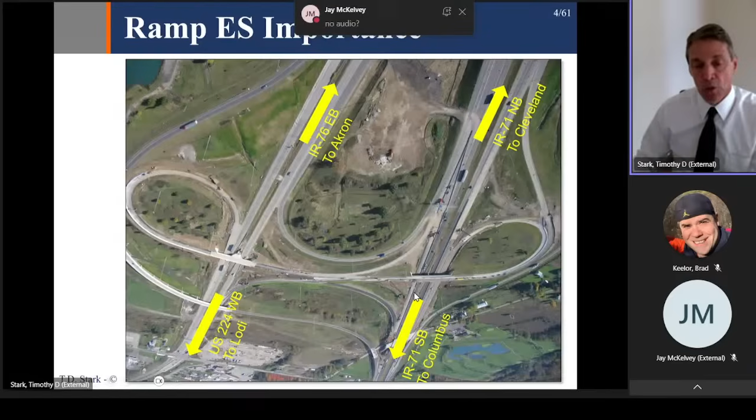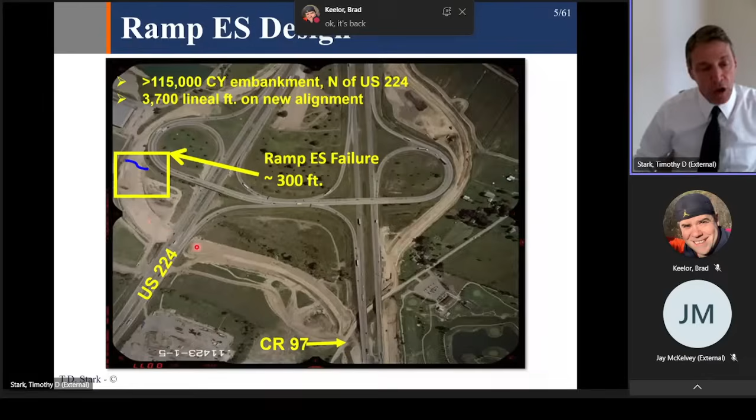We're going to focus over here on this ES ramp. There's about a 115,000 cubic yard embankment. It's about 3,700 feet long. And right in this area where the little blue line is, a creek went through here. You'll see a culvert in just a minute that was placed temporarily through the embankment during construction. Then, on this embankment, there was going to be a bridge across to the other embankment, which is an on-ramp to the interstate heading south.

Prefabricated vertical drains were used to accelerate the consolidation of the soft clays under the embankment. That was known up front. They were weak, soft clays. The drain spacing is 6 foot center to center. The drains are about 4 inches wide, 6 millimeters thick, and they were driven either 35 to 60 feet deep.

A sand blanket, as you can see right here in the lower photograph, was installed on top of the ground surface to facilitate drainage of the consolidation water coming out of the foundation. A T-shaped mandrel and anchor plates were used to drive the PVDs, and that's important because the horizontal hydraulic conductivity, or coefficient of consolidation, is going to be important in just a minute.

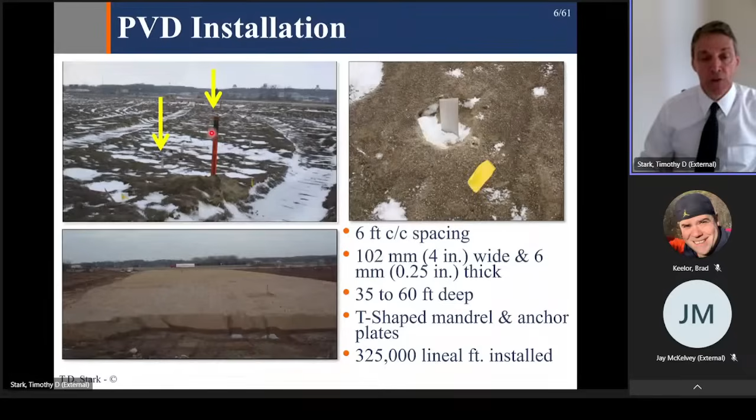325,000 lineal feet of PVD was installed. Some instrumentation was also installed. Here's a settlement plate to monitor settlement of the embankment, as well as some piezometers.

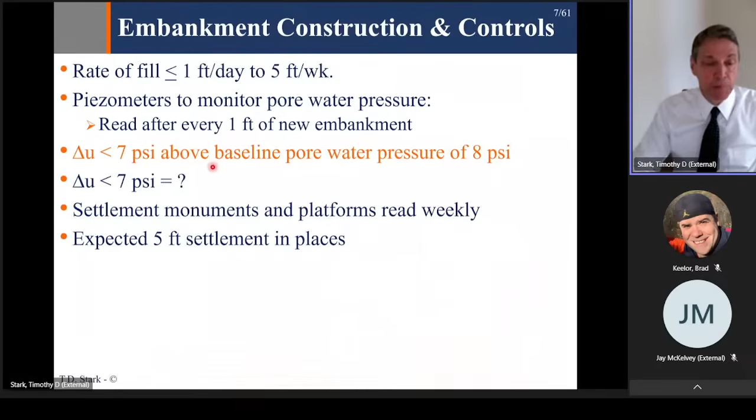The embankment construction was going to be controlled, and the rate of filling could not exceed 1 foot per day or 5 feet per week because of the soft clay and allowing consolidation. Piezometers were installed to monitor the pore water pressure, and if the change in pore water pressure exceeded 7 psi, above the baseline pore water pressure of 8 psi, so a total of 15 psi, the filling would stop. So the rate was controlled as well as the pore water pressure generation. Settlement monuments were read weekly, with 5 feet of settlement expected in some places.

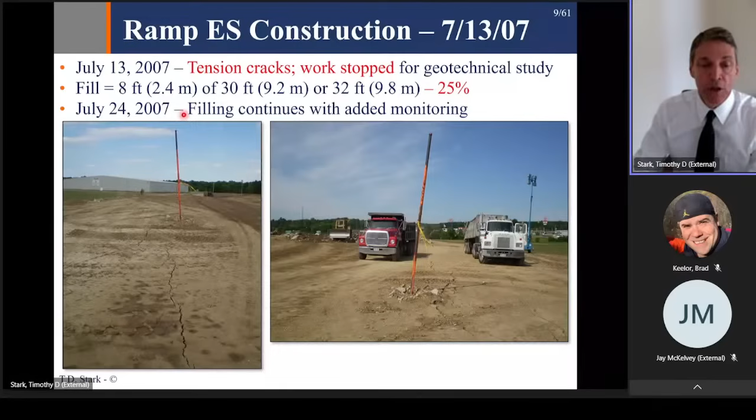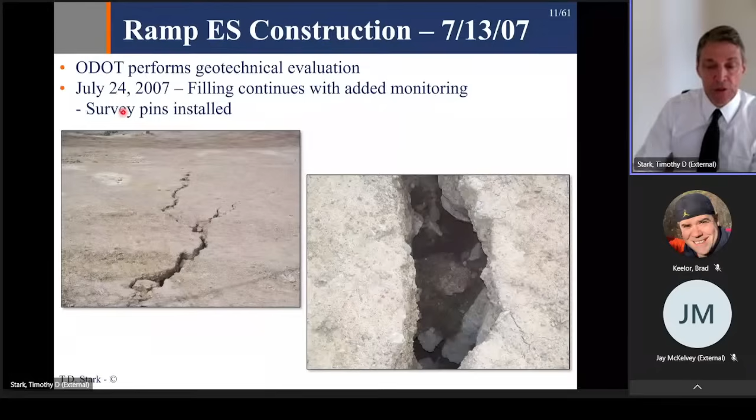Here's the tension cracks, just to give you an idea what they look like. Here's some going across the top of the embankment there. On July 24th, about 11 days later, filling continues with added monitoring. So some survey points and so on to more carefully monitor the embankment. Here's some more tension cracks that developed on July 13th. Okay, so ODOT performs the geotechnical evaluation and lets the filling continue about 11 days later with some survey pins, etc., installed. That goes until July 30th.

More tension cracks develop after the fill reaches now 13 feet. So it's not even half the height of the embankment. August 1st, about 1 month after start, the change in pore water pressure is greater than 7 psi, so work is stopped. Survey pins show uplift and toe rotation outside of the embankment area, basically off the property. And I'll show you a photograph of that in just a minute.

August 2nd, cracking from station 202 to 207, about 500 feet long, develops. August 6th, a 1.5 foot high scarp at the ramp center line develops, and it displaces a chain link fence that separates the right of way from a private property. And I'll show you a photograph of that. And that confirms the survey pin showing uplift and toe rotation.

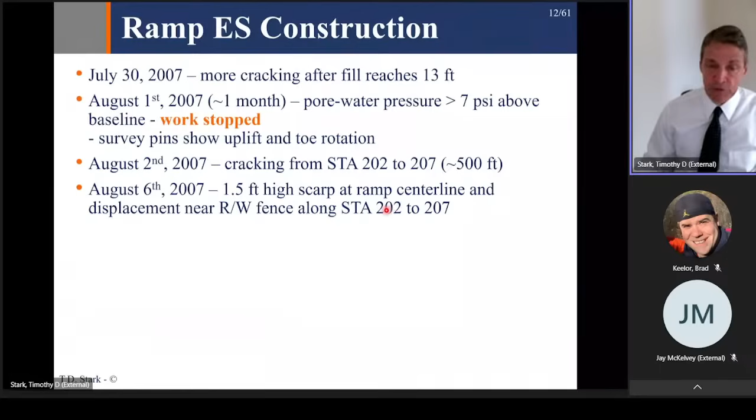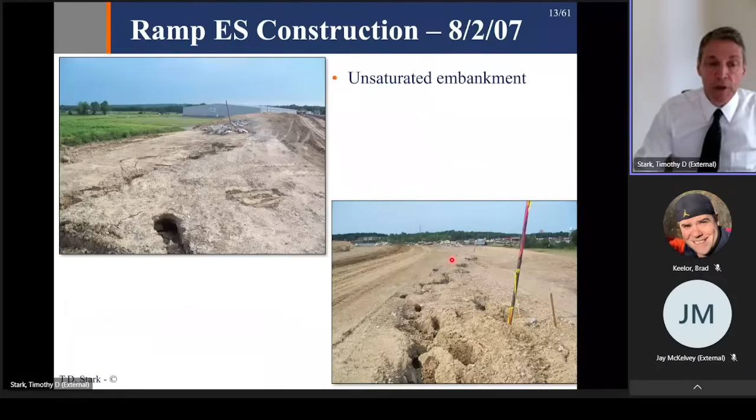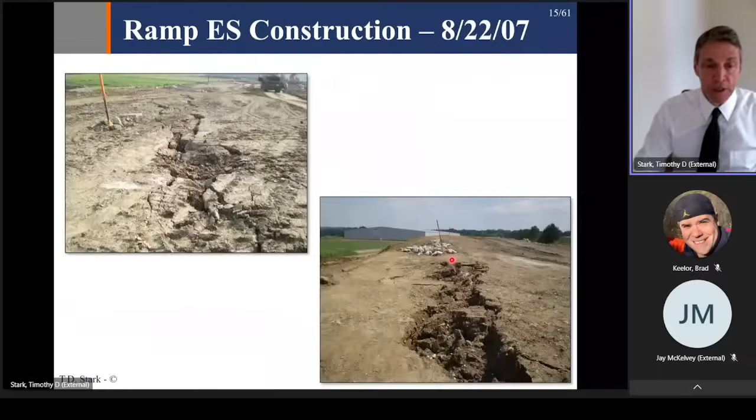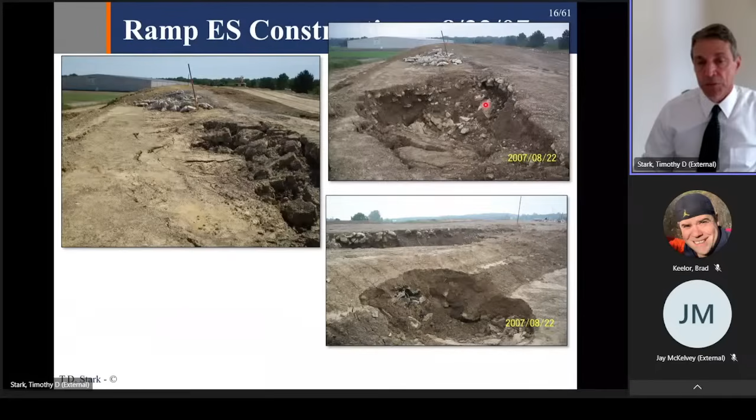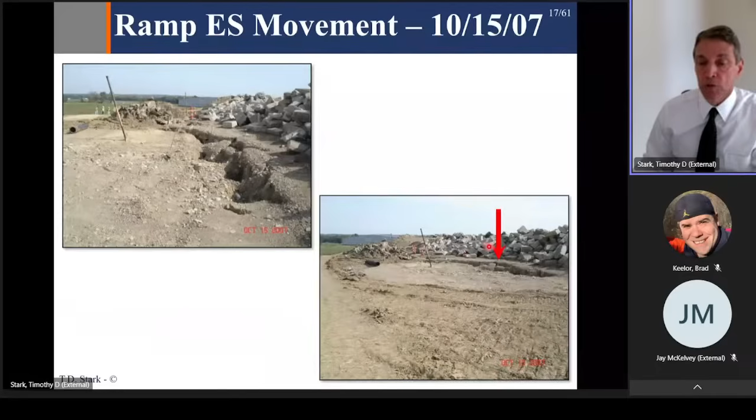October 15th, there's the scarp. There is some concrete rubble fill behind it, which was kind of interesting. The scarp formed in front of the concrete rubble, but that was allowed. The contract allowed for 10% of the fill to be concrete rubble, so that's why it's there.

And now here's the chain link fence that I mentioned earlier in the private property on the left. This fence used to be a straight line right across there, and here's a close-up of it. So the toe rotated up and rotated out, pushing the fence onto the other property.

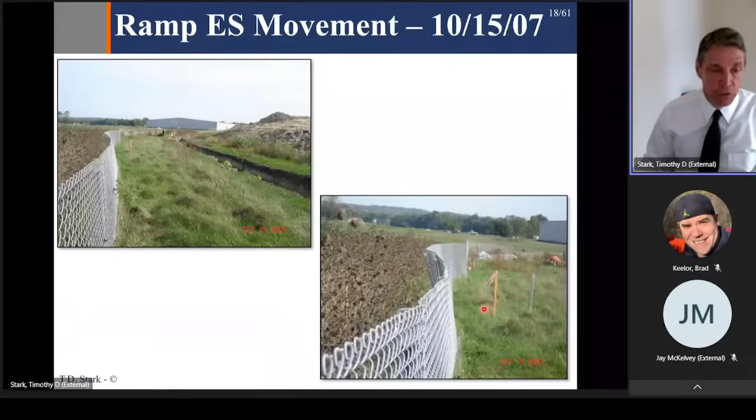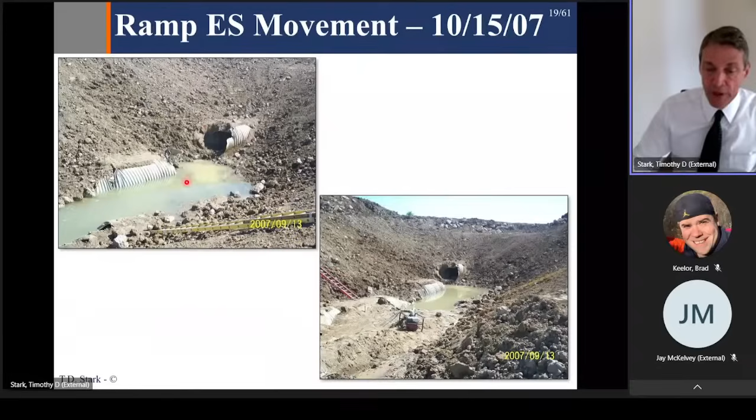I mentioned a culvert installed for the creek. There it is. It was a temporary culvert, and so after the movement of the fence and the stoppage of work, the embankment was excavated to figure out what was happening. And that's a picture of the culvert after it was exposed. You can see it was basically sheared, indicating movement in the foundation, sort of shearing off the culvert and moving it towards the chain link fence.

Okay, so everybody, that's the good news. Bad news is the remediation. A number of techniques were proposed to remediate this embankment area. And what was driving the remediation is a potential contract delay of about $250,000 per month.

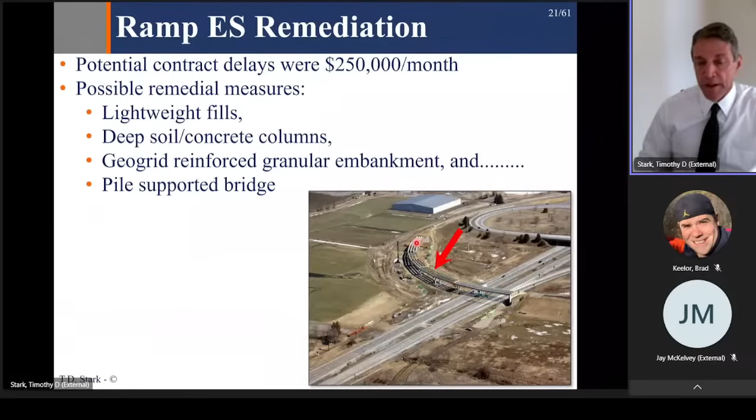Some of the possible remedial measures included lightweight fill, deep soil/concrete columns, geogrid reinforced granular embankment, and other geotechnical type remedial measures. However, and this is the bad news, it was decided to replace the embankment with a pile supported bridge. And that's what you see in the photograph. There's the bridge. So all that embankment material was removed and piles were driven for each of the bridge bents right here. And that off ramp, even today, is a bridge.

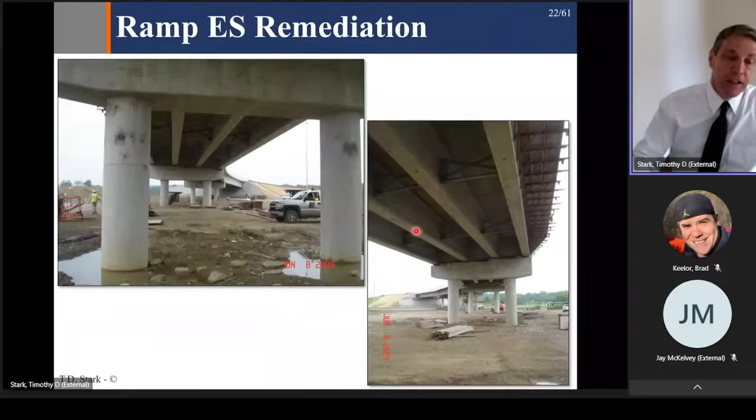And there it is, an aerial photograph. There's the bridge ramp to I-71 heading south. So that's unfortunate that it turned out to be a structural remedial measure instead of a geotechnical remedial measure. But the delay costs built into the contract and some uncertainties about the geotechnical conditions and the performance of the geotechnical remedial measure led to a bridge. So that's really the bad news of the case, that we couldn't keep it as a geotechnical remedial measure.

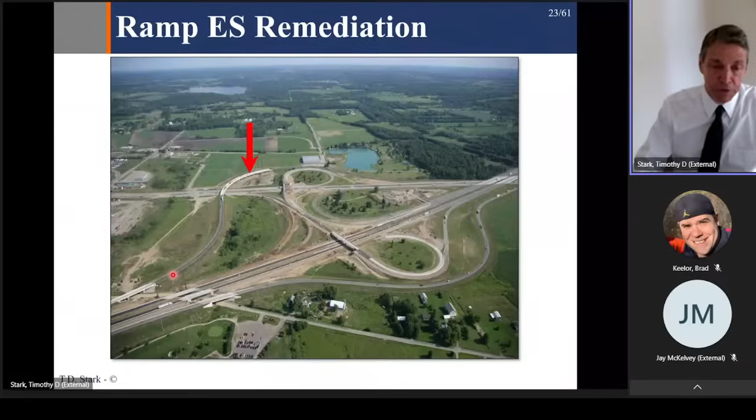Okay, so let me focus on the three causes of the failure. First, stratigraphy, the horizontal coefficient of consolidation, and finally, the embankment strength. These three factors, I think, really contributed to the failure occurring. Okay, so let's talk about subsurface conditions first.

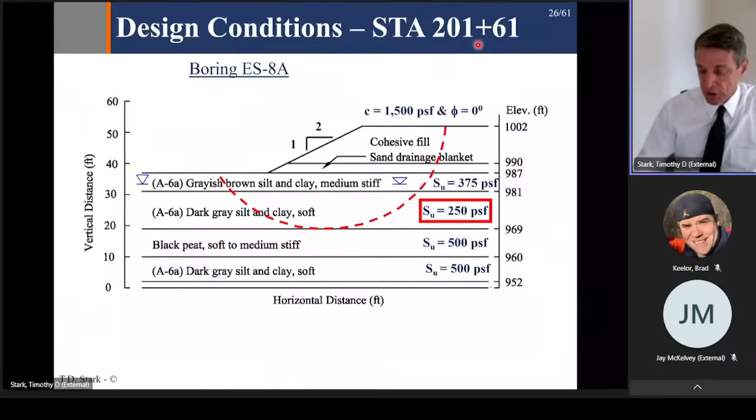So this is the design cross-section, boring 8A, which is in the slide area or the failure area, but there's another boring that is also in the slide area. This one's at station 201+61. The next boring is 8C, as in Charlie, at station 203+58. Notice now that the soft clay layer is deeper. There's 250, 250, just as you saw in the prior cross-section.

But now at a deeper depth, there's an even weaker clay layer, and that's about 10 feet thick from 954 to 964. And a slope inclinometer was installed. That's what this purple square is right here. And that was projected to this station 203+58. And it puts the failure surface in this weaker clay at a deeper depth.

And this corresponds to the old stream area. So there's a thicker weak layer here. It goes from 974 to 954, about 20 feet thick, and the bottom of it is even weaker than 250 pounds per square foot undrained shear strength. So the lesson on this first takeaway, or the first cause, is you must find the critical cross section. Plot up the borings, find the thickest and weakest clay layer, and that's where the design should focus.

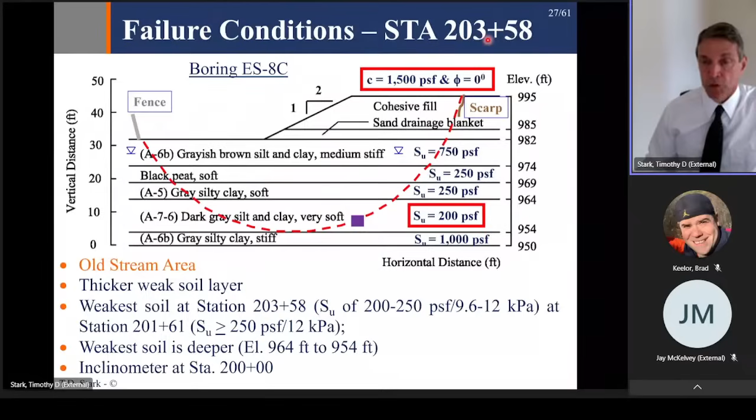And this cross section is in pretty good agreement with the fence being pushed out on the left up here and the scarp developing here in the cohesive fill. The inclinometer was at station 200+00, so it's projected about 350 feet.

Okay, that brings me to cause number 2, the horizontal coefficient of consolidation. That is important because, remember, the prefabricated vertical drains were installed, so we're interested in the horizontal coefficient of consolidation, not the vertical coefficient of consolidation. Okay, because drainage is going to occur radially or horizontally, not vertically.

Okay, so the idea of the PVDs was to speed up the consolidation of the soft clays. And so here are the design values of the undrained shear strength in the foundation, as I showed in the last cross section at 203+58: 250, 250, and the weakest layer being an undrained strength of 200.

So at the end of construction, there would be no consolidation: 750, 250, 200. But the design at the end of primary consolidation at 15 feet of fill assumed that there would be 824, 732, and 477 undrained shear strength in those 3 weak layers, because the prefabricated vertical drains would accelerate the consolidation and allow end of primary consolidation to occur when the embankment reached 15 feet. That would yield an undrained factor of safety of 1.8, which would indicate stability.

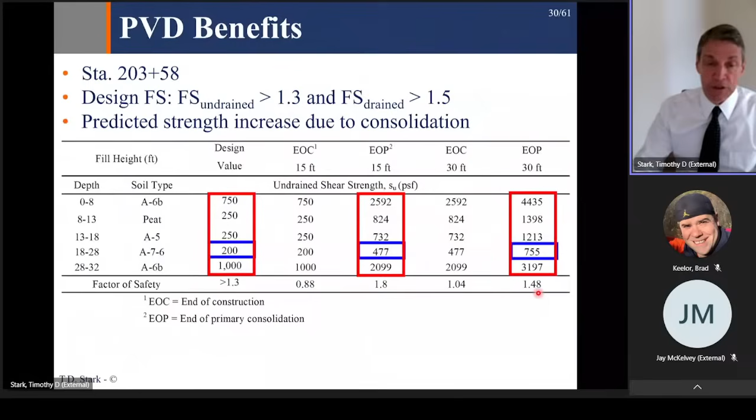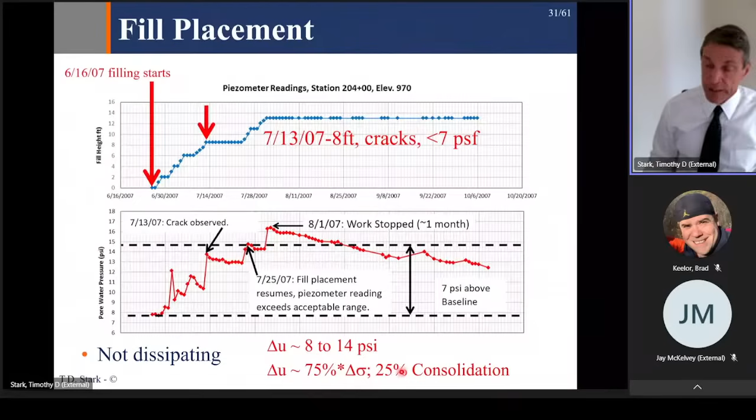But at the end of primary consolidation at 30 feet, now the undrained shear strengths would be 1398, 1213, and 755, which would yield a factor of safety of almost 1.5. And that would indicate the embankment would be stable at 30 feet. Again, it starts cracking at 8 feet. Okay, so here's the fill placement diagram that I showed you earlier. And again, a quick calculation on the increase in pore water pressure compared to the increase in fill height, or delta sigma, would give you an indication that it was really only a 25% consolidation, not 100% or end of primary. So why did that consolidation not occur?

And for all the design engineers out there, my hat's off to you. It's far easier to look at a case after the fact when you know the answer. The hard part is to look at the soft clay up front and get it right. So my hat's off to all the design engineers that are listening. You really have the hard job. My job is kind of the easy job because I know the answer. I know when the factor of safety reached 1. And so it's a much easier analysis. So with that in mind, that's the first bullet, easier than design.

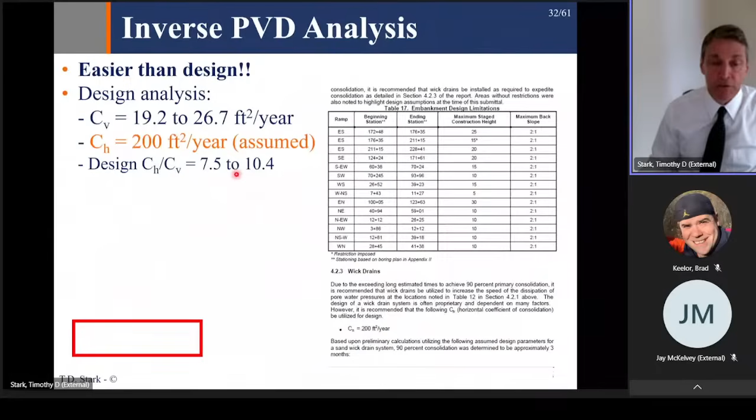The design analysis had a C sub V of about 19 to 26 or 27 feet squared per year. However, the design assumed a horizontal coefficient of consolidation of about 200 feet squared per year. And you can see that here on the right from the geotech report. It comes down and says for the design of the wick drain system, it is recommended that C sub H be utilized for design of 200 feet squared per year. Well, that would yield a design ratio of C sub H to C sub V of about 7.5 to 10.4. And so one of the takeaways here will be, what is a reasonable C sub H over C sub V to use for design?

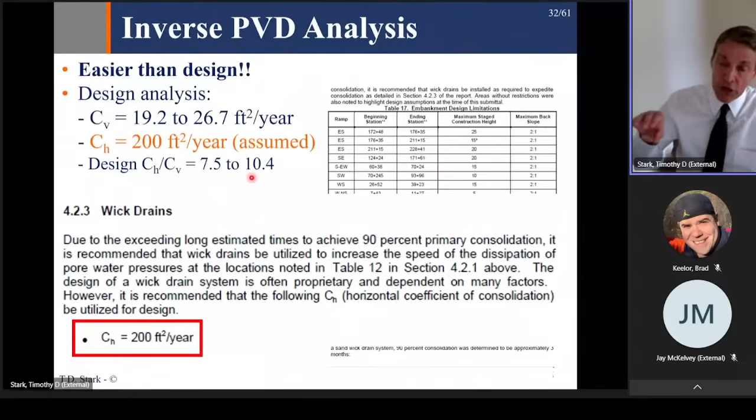And there's a blow up of the recommendation of C sub H being 200 feet squared per year. You'll see on a slide in just a minute, this ratio of 7.5 to 10 is too high. And so the design inherently assumed there would be more radial or horizontal drainage and thus consolidation than actually occurred. So that brings me to the Asaoka method. And this is really a great method for using field settlement data to estimate the mobilized or field C sub H data when prefabricated vertical drains are installed.

So this is a paper by Asaoka in 1978, and you plot the settlement data on a graph of settlement at one time versus settlement at another time. And so that's what you're looking at here. And you draw a line through that. And here's the end of primary right here. And so you can use this plot, and there's some equations. I didn't include all the equations, but they're all built into Asaoka's paper. They're also in my technical paper. And that yields a mobilized C sub H of about 68 to 91 feet squared per year.

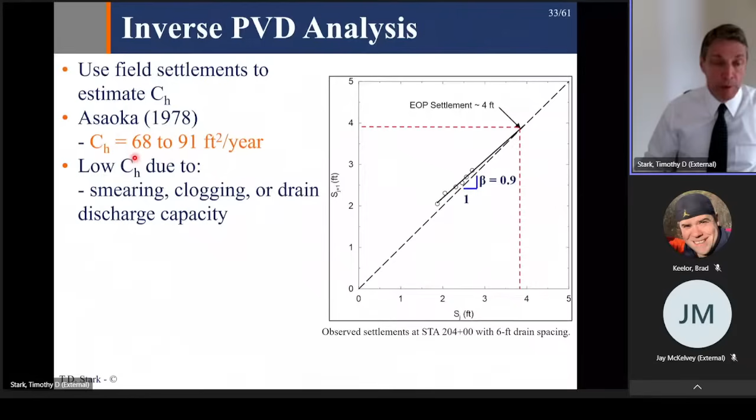So if you are remembering, the design is 200. So this is about a quarter to about half of the design C sub H. And that's really why the foundation clays were not consolidating as fast as it was assumed in the design. The low horizontal coefficient of consolidation could be due to smearing, clogging, or a lack of drain capacity to dissipate the consolidation water to the sand blanket at the top or permeable layer below. So either way, the C sub H ends up to be about a quarter to a half of the design value.

And here's the design analysis. So the C sub H is 7.5 to about 10, the ratio. So a typical design ratio is only about 1.5 to 4. So if you don't have the value of C sub H, use your vertical coefficient of consolidation and multiply it by 1.5 to 4. Maybe a good number might be 2.

And if you would do that, 2 times 68 would only be like 136, not 200. And so using the Asaoka value of C sub H, you calculate a ratio of 2.6 to 3.6. Okay, that ratio is nicely within the typical ratio of 1.5 to 4. And this is the main reason why the foundation clays did not consolidate as fast as was assumed.

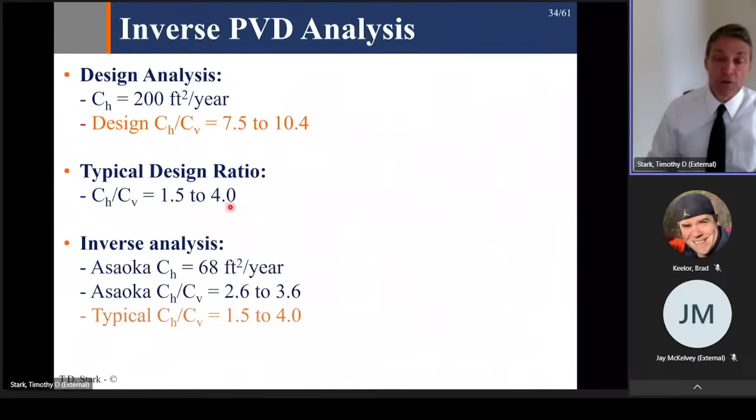Okay, so takeaway lesson number 2. Use a ratio of C sub H to C sub V of 1.5 to 4. The first takeaway is find the critical cross section, find the weakest soil stratigraphy, and use that for design. Okay, so the Asaoka method, verify design assumptions and C sub H, and this follows the observational method with Professor Peck. Design for the most probable conditions, understand problems for most unfavorable conditions, such as the C sub H being a quarter to a half of the design.

Select quantities to be measured and calculated during construction. And so this case would be settlements of the embankment, and then your calculation of C sub H using the Asaoka method. And once you've calculated C sub H using the Asaoka method, you could see that it was not consolidating as fast, so you could change the fill rate procedure such that you did not have the failure. Select design modifications if deviation, start construction and measurements, and adjust filling rate to maintain stability. This turned out to be a pretty expensive repair with the bridge replacing the embankment, and so having this in place could have saved a substantial amount of money.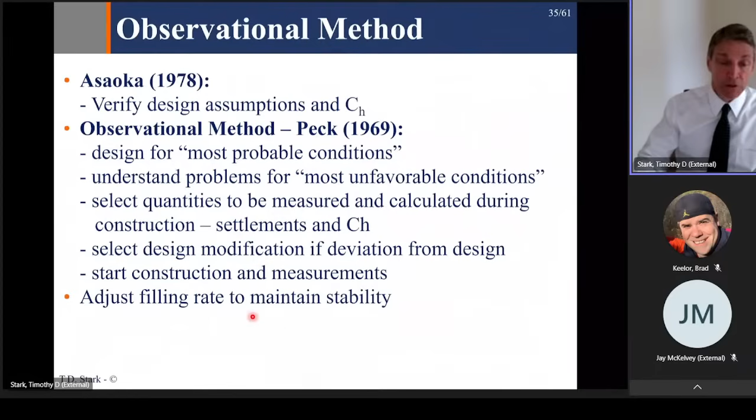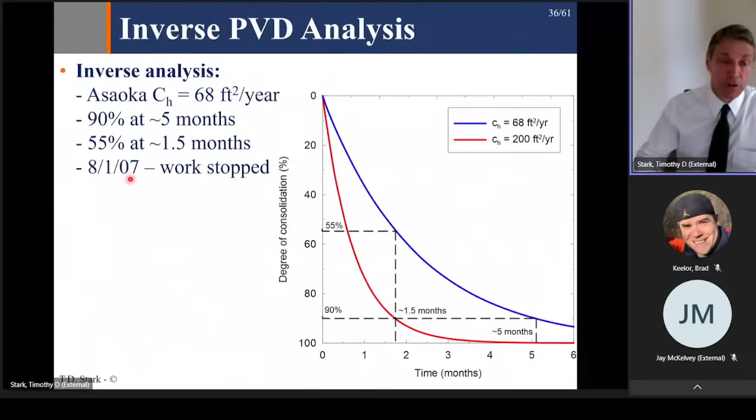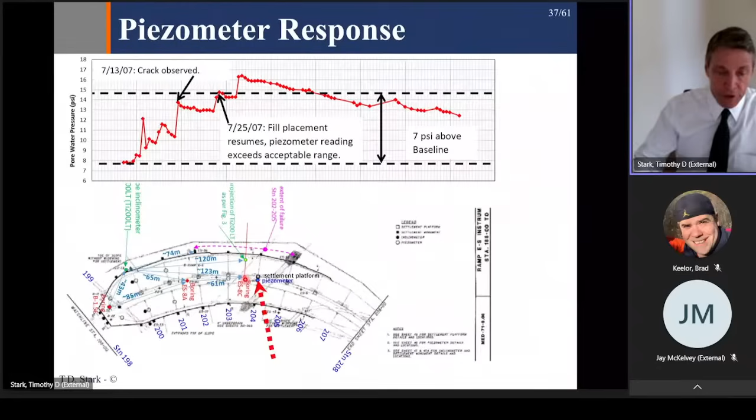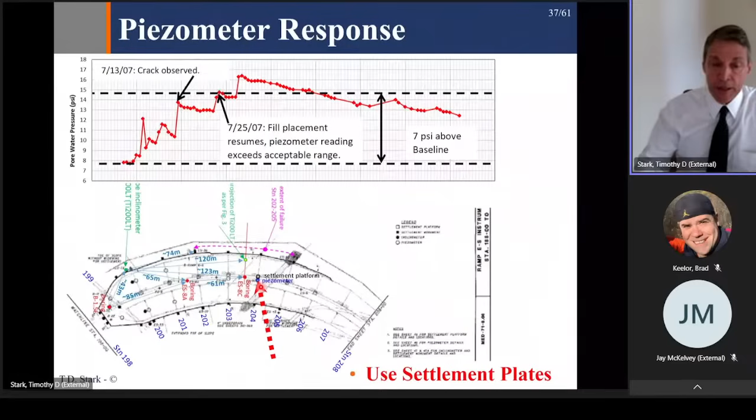And here's the piezometer response. As I mentioned before, the piezometers. This is the critical cross-section right here, boring 8C. The design cross-section, this is the boring 8A I mentioned earlier, is over here on to the left, and the failure developing right here around boring 8C. Okay, and there's the piezometer right there, right close to boring 8C, and that's what gave the piezometric response I showed earlier and above. Use settlement plates, and that's really important because that allows you to use the Asaoka method to estimate your mobilized C sub H. Okay, that brings me to the third cause, embankment strength.

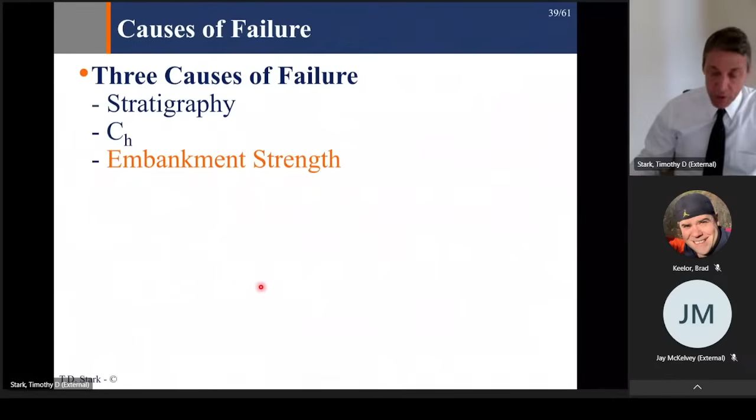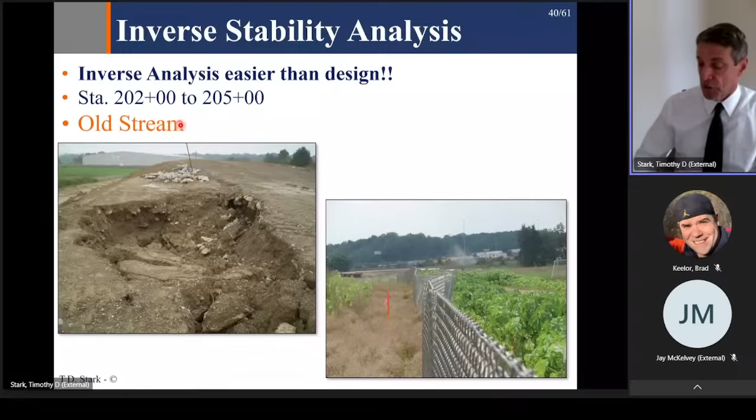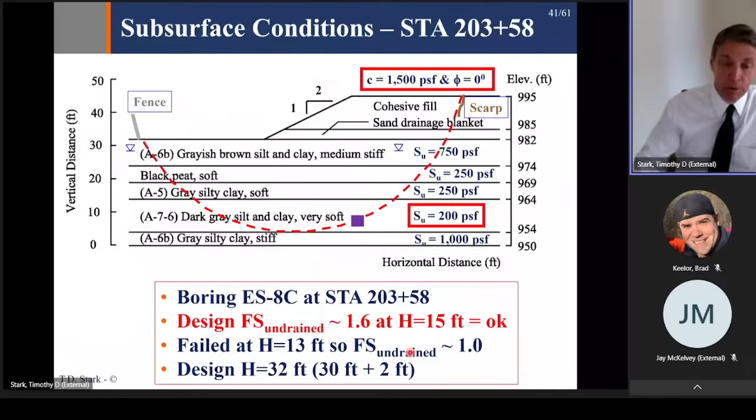So the design undrained factor of safety was 1.6 at a height of 15 feet. And that's why it was assumed to be okay for design. But the embankments failed at only 13 feet. So again, we know the answer is 1.0 at 13 feet. And that's well less than the 32 feet that was the focus. But you can quickly do a bearing capacity analysis before you do your slope stability analysis, and you could see that this was going to be a problem if the consolidation did not occur. So that's what's next. Here is the undrained bearing capacity analysis.

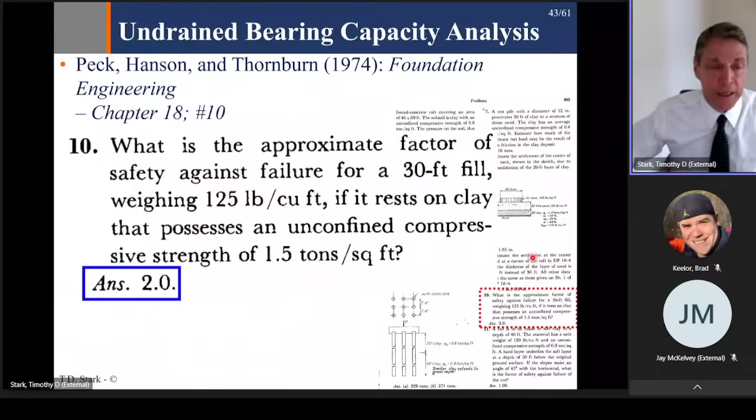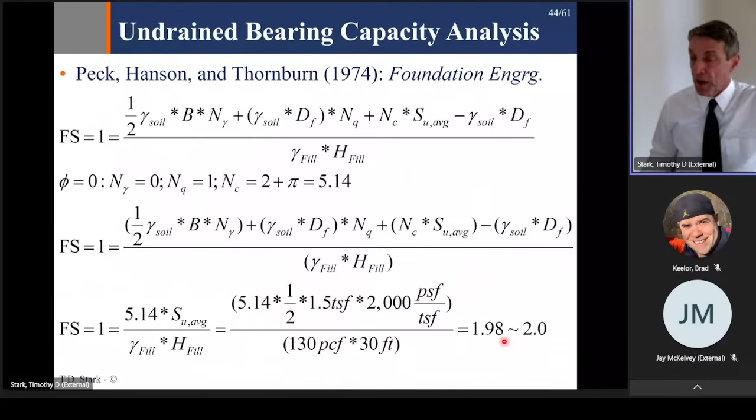So here's the analysis to solve that homework problem. There's the bearing capacity equation at the top with phi equals 0, N gamma is 0, N q is 1, and N sub c becomes 2 plus pi, or 5.14. So I plug in those numbers, and that gives me 5.14 times Su over gamma h, which you saw here earlier. Now I plug in the numbers. Unconfined compression, take a half of that, and divide it by a 30-foot high fill, you get a factor of safety of 1.98. So you would get that homework problem right in Peck, Hanson, and Thornburn.

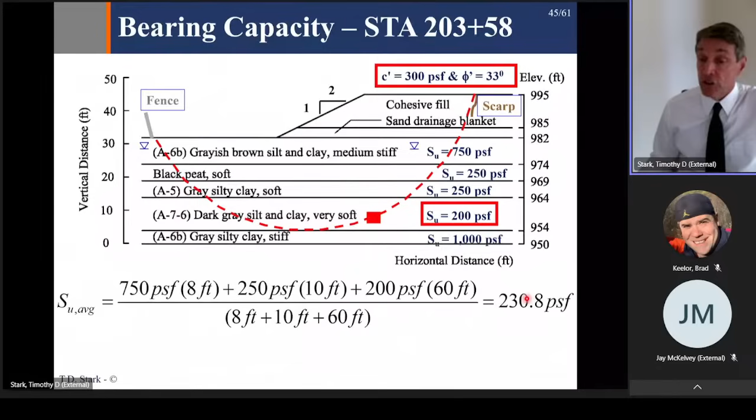So now let's apply it to station 203 plus 58. So we have to come up with an average undrained strength across the foundation. And that's what's in this equation here. So 750 times 8 feet, 250 times 10 feet. And that's those two layers of 250 pounds per square foot. And then about 60 feet from about here to over to here for the soft clay at 200 pounds per square foot. And then I divide by 8, 10, and 60. That gives me an average undrained strength along the failure surface in the foundation, only the foundation. I'm going to get to the embankment in just a minute, of 230.8.

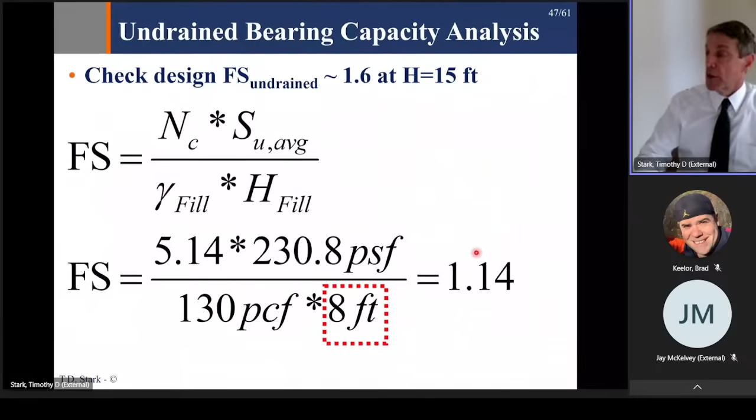And as you saw, at 8 feet, it started cracking. So let's try 8 feet now. So if I use my average undrained strength of 230.8 and I divide by 8 feet of embankment and 130 unit weight, I get about 1.1, which is a little higher than 1.0, but clearly this shows that the factor of safety is not 1.6. Even getting to 8 feet is going to be close to failure, and certainly getting to 15 or 30 feet is going to lead to failure. So again, just try a quick undrained bearing capacity analysis before you engage with the full slope stability analysis.

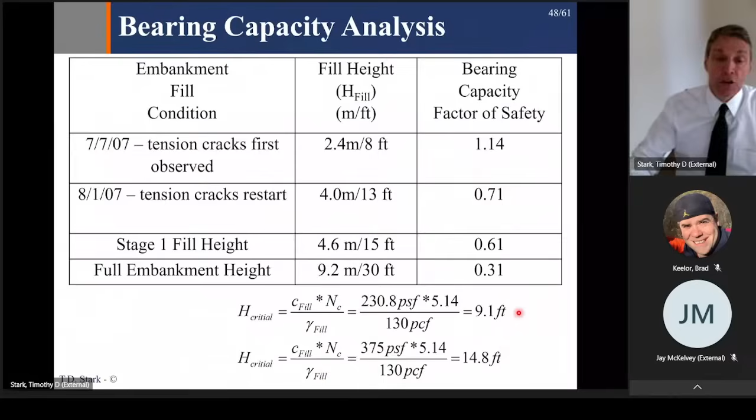Okay, so here's a table that summarizes those factors of safety from the undrained bearing capacity analysis. At 8 feet, there's 1.14 that I just showed you. Tension cracks restart at about 13 feet. The factor of safety is 0.7. 15 feet, 0.6, and 30 feet, of course, would be even lower. So the critical height for the embankment, you can calculate using the bearing capacity analysis, is about 9.1 feet. Pretty good agreement with the tension cracks starting at 8 feet. Okay, so that's a quick use of the bearing capacity analysis.

But that still doesn't answer the question why failure occurred at 13 feet and why the undrained factor of safety of 1.6 at 15 feet is incorrect. And that gets to the shear strength of the embankment fill material. So the compacted fill strength parameters are C of 1500 and a phi equal to 0. So notice this is the moment equilibrium factor of safety equation. So phi equals 0, this term drops out, and you're left with C times the length of the failure surface through the embankment. So at 15 feet, you would be multiplying 1,500 pounds per square foot times 15 feet.

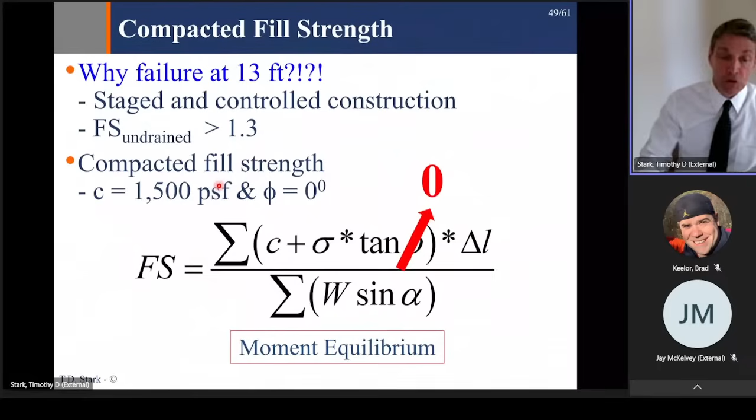And that basically inflates the factor of safety because you're generating so much strength out of the embankment compared to the soft foundation. And that's the real takeaway on the third piece: the compacted fill strength can't be 1,500 pounds per square foot. So that came from what is now an inactive Geotechnical Bulletin number 6. This bulletin is no longer active, so do not use it.

But if you come into the bulletin at a soil type of A7-6, which is the clay, you get 1,500 pounds per square foot. And that's where C is 1,500 and phi is equal to 0. There's a drained friction angle below that is a function of PI, and the PI is 10, so you would estimate a friction angle of 33 degrees, effective stress friction angle, and a C prime of 0. So that would be a better parameter to use than the undrained shear strength for an unsaturated embankment, okay?

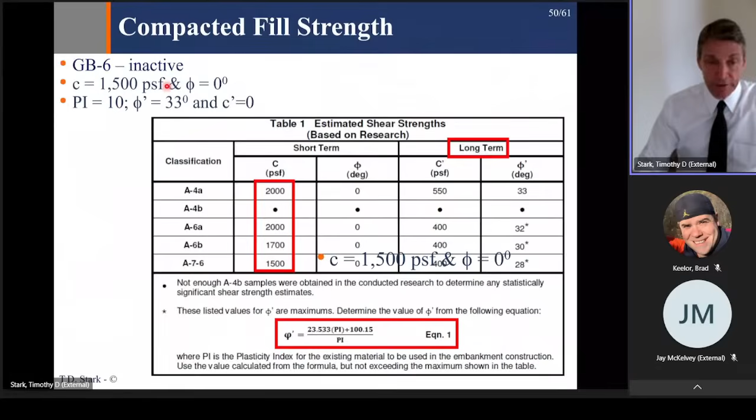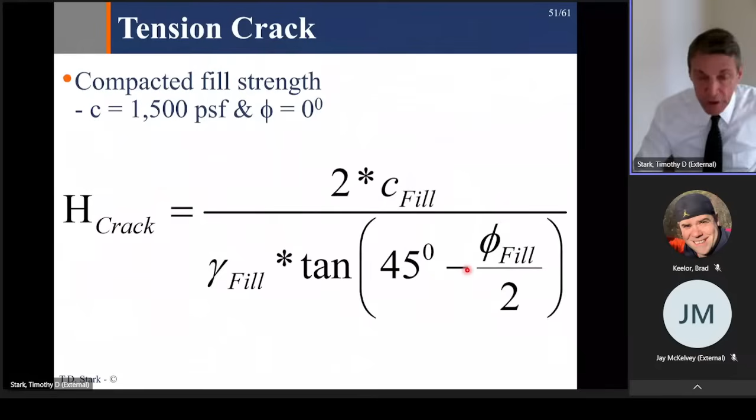But that's still a problem because the cohesion of 1,500 is multiplied by the full length of the embankment. So what you need is a tension crack. So you can calculate the depth of tension crack using this equilibrium equation, 2 times the cohesion of the fill divided by gamma fill times the tangent of 45 minus phi prime over 2. So if you calculate that, the tension crack is 23 feet for C of 1500, which was assumed in design.

So unfortunately, we're online, but I hope everybody online realizes the importance of 23 feet here. So that means the embankment would have no strength for 23 feet. So at 8 feet, it should have no strength. At 13 feet, it should have no strength. So it failed at 13 feet because it had C of 1500, whereas really there should have been a tension crack that prevented the embankment from generating any strength in the stability analysis, thus making the stability analysis essentially the undrained bearing capacity analysis I showed you.

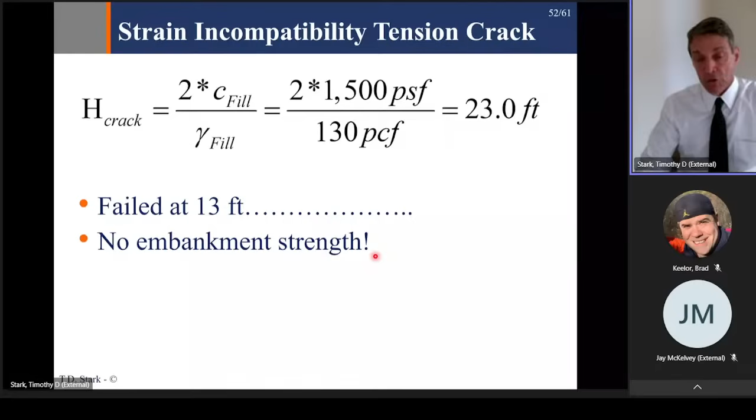So last bullet, no embankment strength. So don't forget, most slope stability software allows a tension crack, and you can put the tension crack in with water or without water. We used without water because it was fairly dry. You saw how dry the embankment is, but if you add water, that would put a lateral stress also on the tension crack. Chirapuntu and Duncan have a more sophisticated equation that takes into account the modulus difference between the fill and the foundation to calculate the depth of the tension crack. And that's shown in this equation.

K is the modulus of the foundation. K of the fill is the modulus of the embankment fill. C is the foundation, and the width and depth. So using Chirapuntu and Duncan's procedure, you estimate a tension crack of 15.5 feet. So again, the embankment would contribute no strength because of the strain incompatibility between the soft clay in the foundation and the stiff embankment on top.

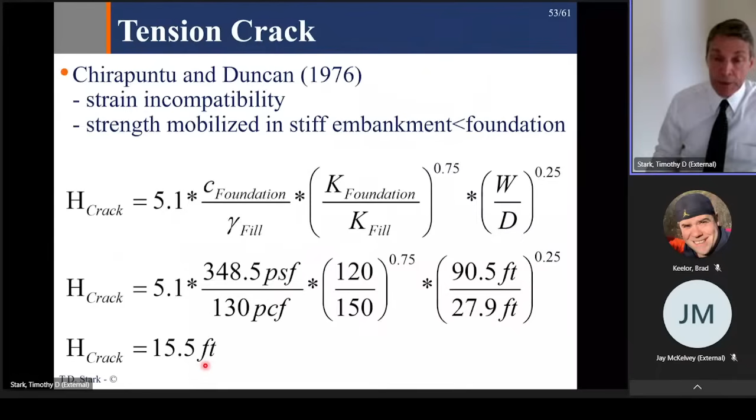Okay, one last point on the stability analysis is determining the undrained shear strength. For design, the undrained shear strengths that I showed in the cross section were estimated from SPT blow counts. And the correlation by Bowles of Su equals 6 times N was used. The correlations for undrained shear strength with blow count tend not to be reliable, and that's stated by Peck, Hanson, and Thornburn, 1974. Standard penetration correlations for clays can be regarded as no more than a crude approximation, but for sands is often reliable enough to permit the use of N values in foundation design, which Peck, Hanson, and Thornburn is built on for sands.

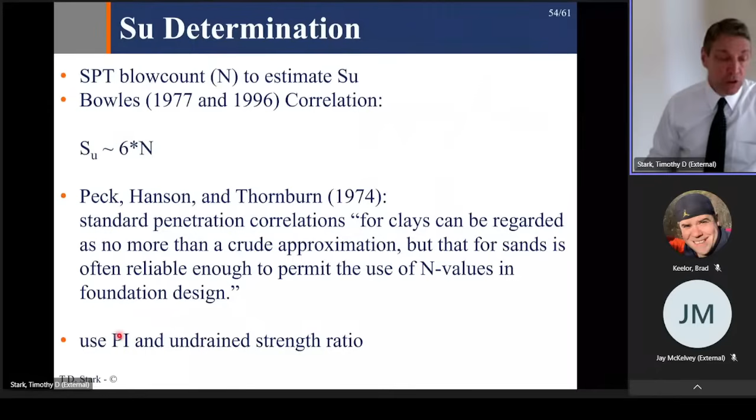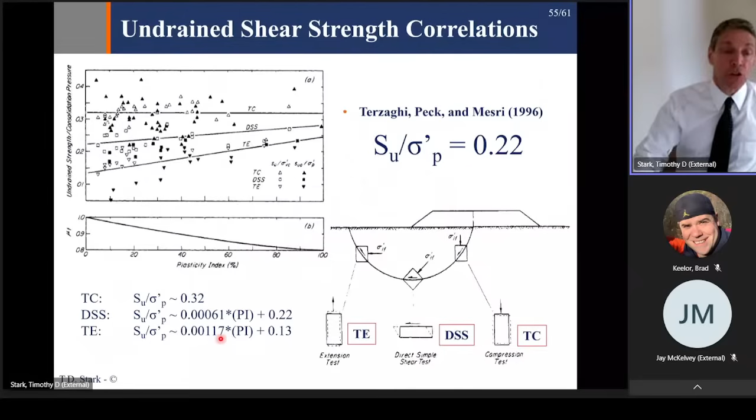So instead, use the plasticity index and estimate your undrained strength ratio by a correlation such as this. This is from Terzaghi, Peck, and Mesri. You could come in at, say, direct simple shear or triaxial compression, and you would estimate an undrained strength ratio from, say, 0.22 to about 0.32. If you want a mobilized undrained strength ratio, 0.22 would be a good value. So you could use that for your undrained strength estimate.

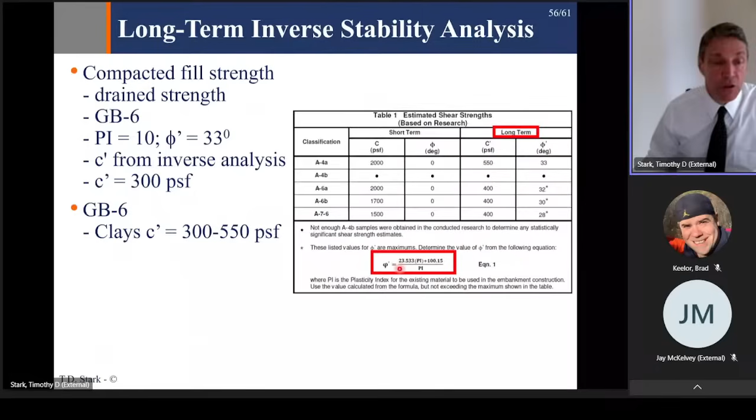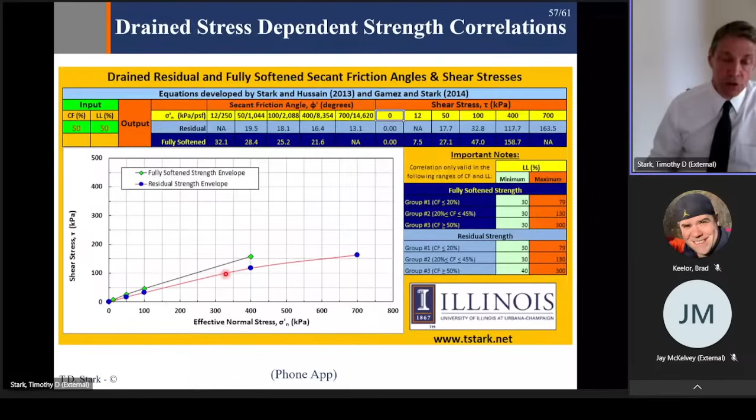So, and then if you looked at the long-term stability of the embankment, you use effective stresses, as I mentioned earlier, phi prime in this bulletin, or you could use our spreadsheet, which gives you fully softened strength, and that would be the long-term strength of the compacted embankment. It could soften over time, over the service life. So design the embankment using the drained, fully softened strength, which is shown here. There's the friction angle, fully softened friction angles from 32 to 21.6. And here's the fully softened envelope, 0 to about 158. Fully softened is the black line here, and the residual friction angle is the red line. Okay.

So summary of the stability analyses. Draw a new cross section where there are changes in soil stratigraphy, and use those to locate the critical cross section for stability analysis. So review the borings carefully, find the weakest layers.

Big impact of the cohesion or undrained shear strength on factor of safety. So for the embankment, you can't assign it a C value or undrained strength value without a tension crack because of strain incompatibility. So if you use an undrained strength for the embankment, you must use the tension crack, and you can estimate that by equilibrium or Chirapuntu and Duncan's analysis.

Finally, before the computer analysis for factor of safety is undertaken, perform a quick undrained bearing capacity analysis. Understand what the guardrails are for your factor of safety and the critical height of the embankment before the software starts up, so you have an idea of what the answer is going to be.

Shear strength correlations. Use those for planning level design. Use Atterberg limits, not SPT, to estimate the undrained shear strength if you're going to use that for the embankment. Also, you can use the Atterberg limits to estimate the fully softened strength for the compacted embankment. And for the foundation, instead of blow counts, you could, of course, use the cone penetration test.

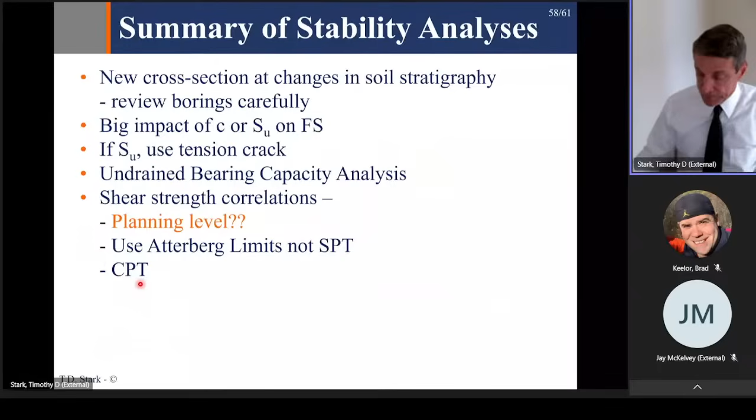Okay, so to wrap up, three reasons for the failure: stratigraphy, the value of the coefficient of horizontal consolidation, and the fill strength used for the embankment. So when you have a stiff embankment over a soft foundation and you're using an undrained strength or a C for the embankment, include a tension crack. You can estimate that using this simple equilibrium equation.

Don't use a blow count to estimate Su. Use PI and get an undrained strength ratio. Use your undrained bearing capacity to guide your short-term or end of construction analysis. Use a reasonable range of C sub H over C sub V of 1.5 to 4.0.

So if you only measure C sub V in typical consolidation or oedometer tests, multiply that C sub V by a value between 1.5 and 4, say maybe 2, and then use the Asaoka method during fill placement to estimate the mobilized C sub H and make sure that the consolidation is occurring as you predicted or assumed. If not, modify the fill, reduce the filling rate such that the consolidation occurs

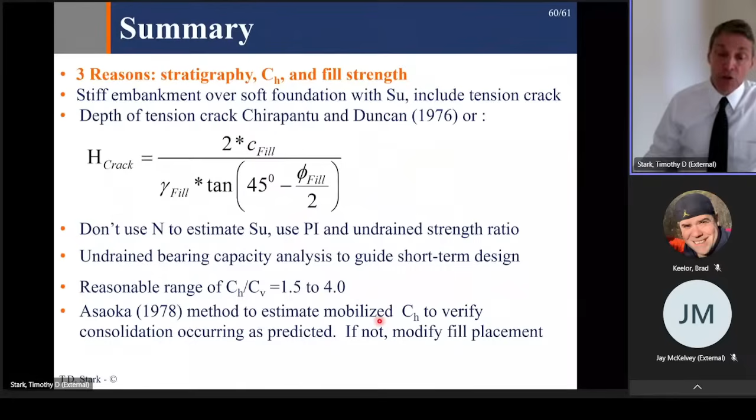and you don't end up with an expensive failure. Okay, the next national lecture is on July 18th, and I will discuss a cement, bentonite, and jet grouting cutoff wall performance. So thank you so much for joining, and I look forward to your questions.

Well, thank you very much, Tim. Excellent presentation. I'm going to start the questions off.

Why is a tension crack needed, and should it be filled with water? Okay, great. So yes, the tension crack is needed because there's a strain incompatibility between the soft foundation and the stiff embankment. In other words, you will get to peak or failure in the foundation quicker than you will in the embankment. And second, the embankment strength of that C is getting multiplied by the 30 feet or full height of the embankment if you do not have the tension crack, and that dominates the factor of safety equation. So you need the tension crack because generally you're not going to develop that strength in the embankment before the foundation clays fail.

And the second part you asked about is the water. So you can put water in it if you want. That just puts a little more pressure on the slide mass. But in this particular case, we didn't. It was fairly dry.